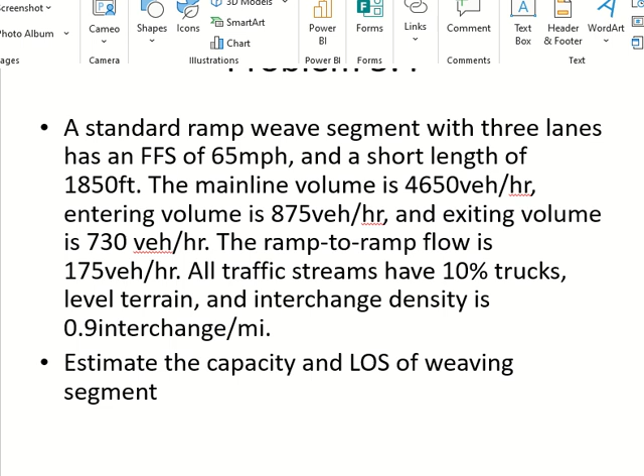Same? Okay, so what do we say here? What does it show? We check that it is less than what? So now we have the total flow and the capacity. So what can I say now? Oh, very good, I will give you that, yes.

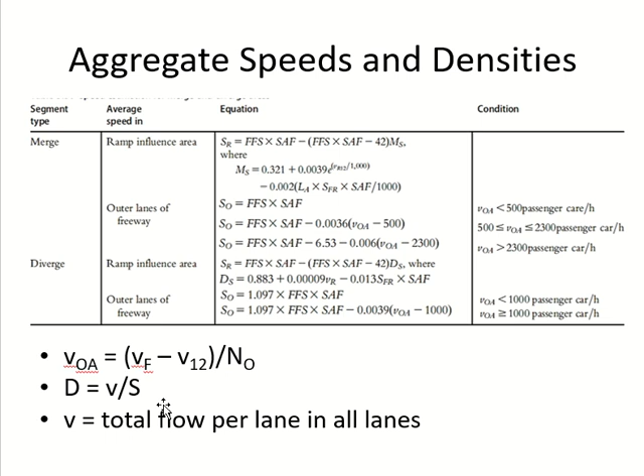And I need the ideal capacity for freeway per lane. How much is the free flow speed? 70. Is it given here? Yeah. 2400 - this is the ideal capacity for the freeway. If your free flow speed is not mentioned, in the previous slides you will see an equation as well. You can use the equation, but since our free flow speed is exactly 70, I can use 2400 here.

So what is the capacity of the weaving segment? 0.0765 times L, LS is 2000.

2127. For the check, I need the total - this is per lane, I need the total. How many lanes do I have? 3. So CIW is how much?

6381. Now our total flow was 5,700, right? So this is more than that. That means what? Good.

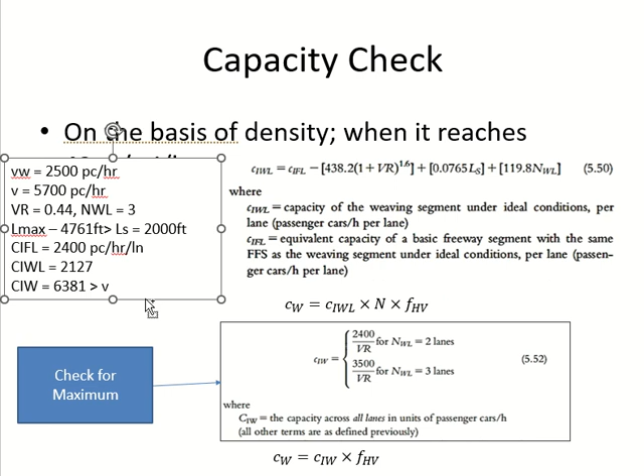The next thing we have to do is find out the lane changes, total lane changes. We have to find out the minimum as well - we did not do the minimum. This will give you minimum number of lane changes.

Both ramps are on the same side, so I will use the first equation. So how many lane changes required to go from ramp to freeway? If I go to my figure, one lane - ramp to freeway, 1. And freeway to ramp, 0. We are talking about required.

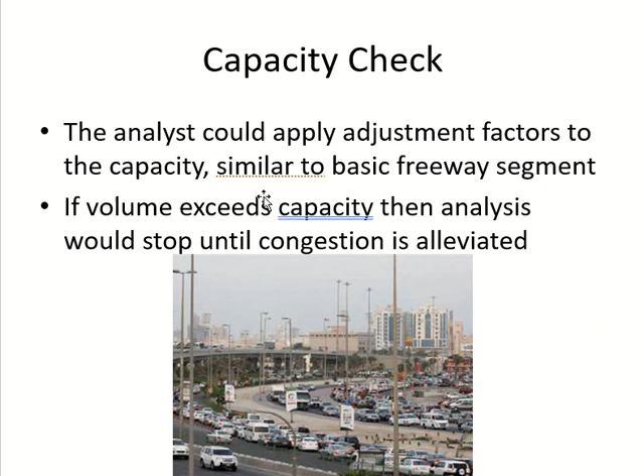Required - so you are on the ramp, you want to go to the freeway, you make 1 lane change and you are on the freeway. This is required. Somebody wants to go in the second lane, they can, but it's not required.

Somebody is on the freeway, he wants to go to the ramp, he can just continue - not required. Nothing required. He can select to be in the other lane, but that's his choice, not required. So ramp, freeway to ramp, 0. Freeway to ramp, 0. But there is one.

Where is 1? From the third - no, required. Required meaning what? You are in the right lane, and then you have to go - you are in the right lane, still you have to do, that is required.

Okay, if you are here, you should not be here. Why are you here? This is what you are thinking right now. Huh? Why are we here?

Okay, so freeway to ramp is 0. Ramp to freeway we have 1. What is the volume for ramp to freeway? 800. So 800 into 1 is 800. So minimum lane changes are 800, only for ramp to freeway with 1 lane change.

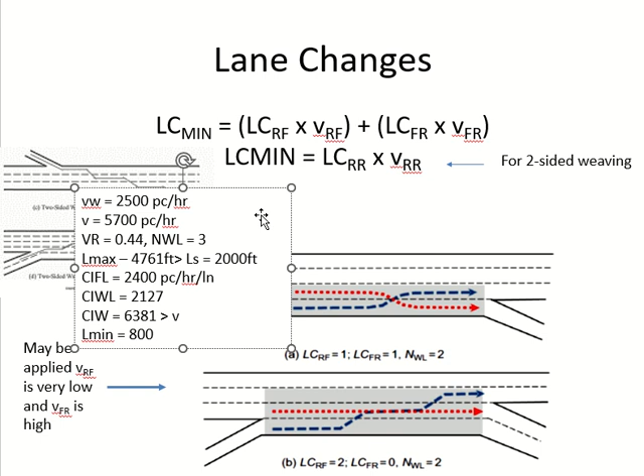Next, now we have to find out the total weaving lane changes. Weaving meaning people who are going from ramp to freeway or freeway to ramp. The one we calculated just now is required. So you are in the right lane, but still you have to make this change. So this 800 is required this way. We calculated the first one, now we still have to calculate this one.

Interchange density is given as 0.8. And total number of lanes, which are 3. LS is 2000.

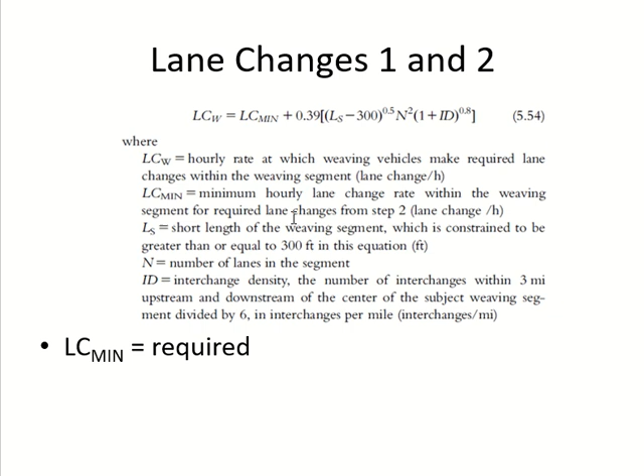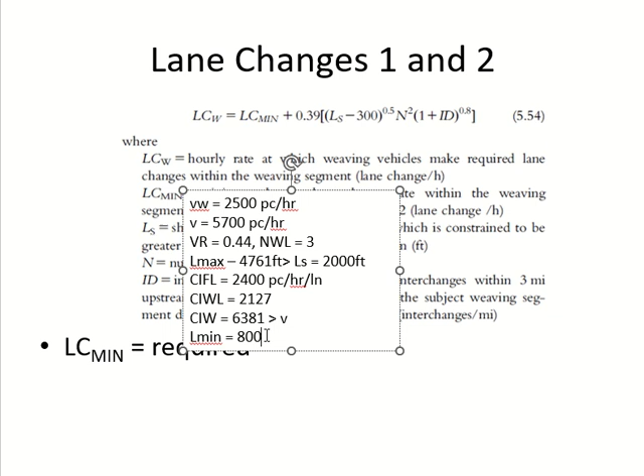How is that? Interchange density given 0.8.

Okay, we call them lane changes per hour. These are called lane changes per hour. So these are for people who are weaving.

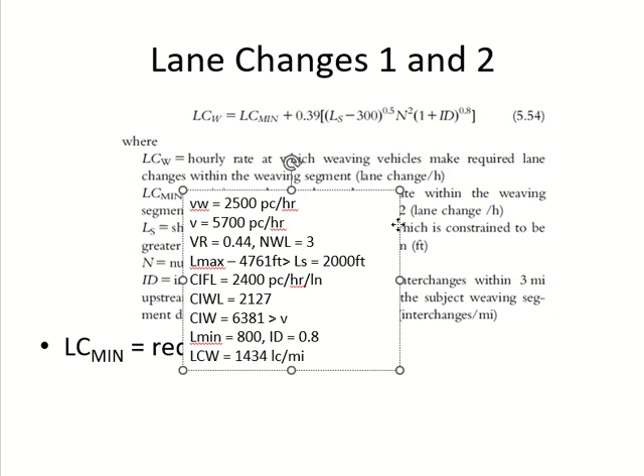And then for the other people who are non-weaving, we have to first calculate the non-weaving intensity. So again LS is given, this is given 0.8, this is non-weaving volume. My total volume is 5700.

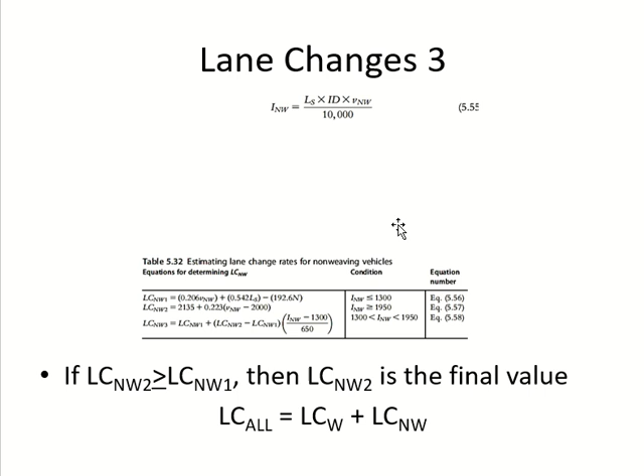And you can see the weaving here as well. 5700 total, and weaving is 2500. So the remaining is non-weaving. How much is non-weaving here? 3,200.

Give me non-weaving intensity. LS 2000, 0.8. 512.

Now we come to this table. This table says that if you are in this range, less than 1300, then non-weaving will be this one. And there is a condition given here that if you are doing this one, then check with this one as well. You have to calculate both of them, and you will take the one which is maximum.

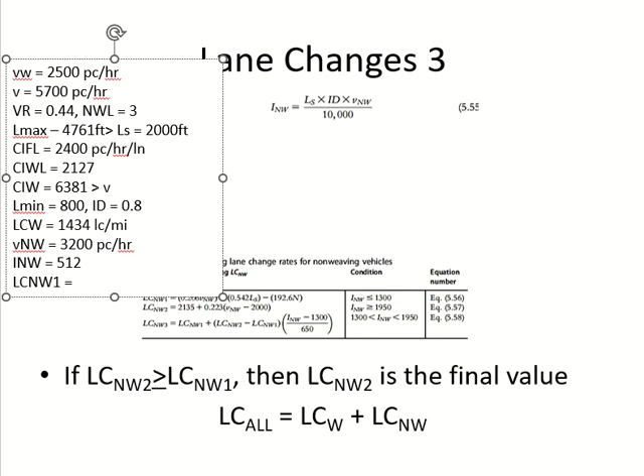We have to check more first. First, yeah.

But if our INW, it's not greater than 1950. Yeah, it's not. But they are saying that when you take this one, it should not be more than this one. No, it should be more than this one, yes. To take this, there are two conditions: INW should be less than this value, and this value should be more than the other one.

611, 612. No cheating, no cheating. No, I want to see how they did different things. No, 611. 2024 or 2402.6? Which one? Second. Okay.

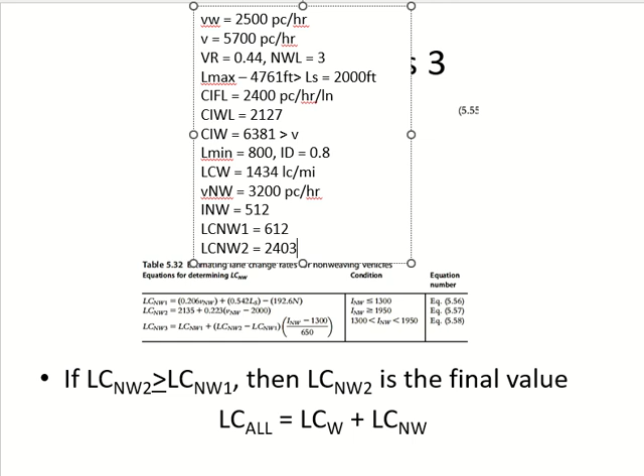First one is wrong. Which first one? NW1, how much is that? 1165. Everybody agrees? Yes. Okay, and the second one is correct.

So our answer still doesn't change. The second one is still higher. We'll take this value.

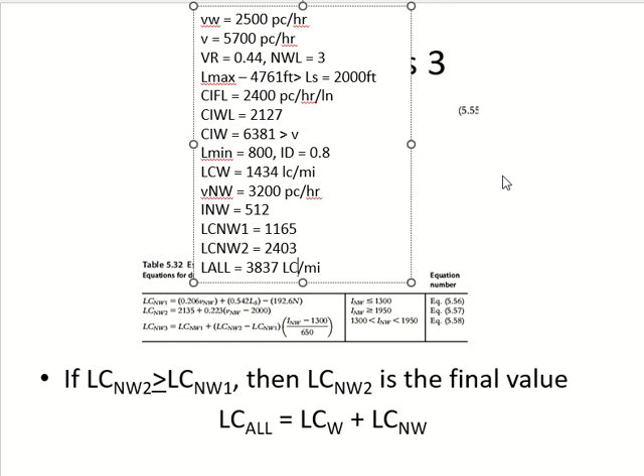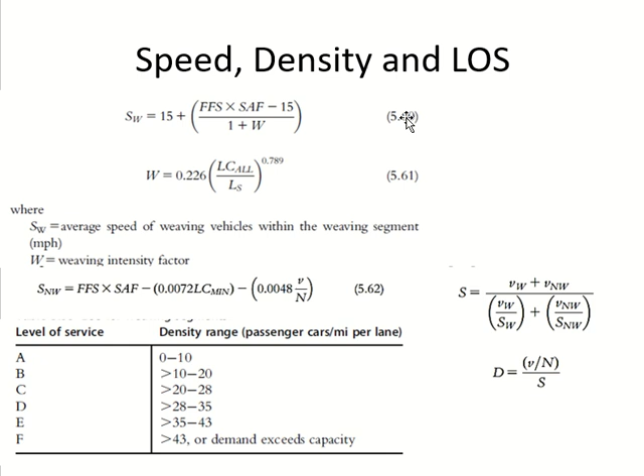Now we are at the last stage where we will calculate the speed of weaving, non-weaving, and we will calculate the total speed, the average speed, and then the density. Give me the weaving speed.

Okay, then the non-weaving speed, this one. We use total flow here and total lanes. Total flow 5,700, total number of lanes 3. This one.

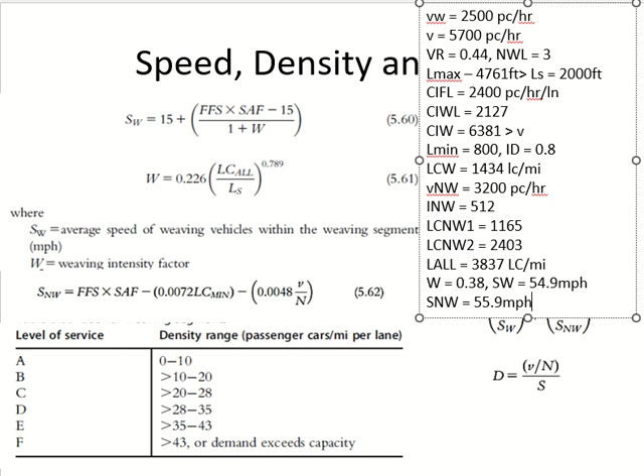Okay, normally non-weaving should be higher speed and weaving should be less. Weaving people have to make changes and they are going from ramp to freeway and freeway to ramp, so they will be doing it slowly and so on. Okay, then what is the average speed now?

So we'll add the weaving and non-weaving together now. Total volume 5,700.

63, huh? 63? Sure. 55.

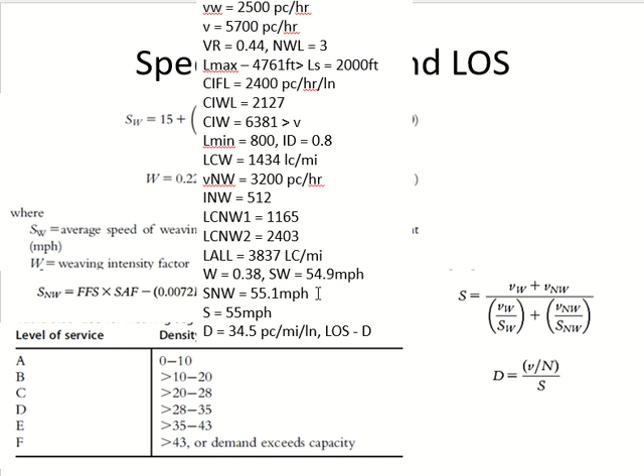Simple, innocent, right? More accurate. Very good. So simple average can be used if all segments have the same length, same number of lanes, everything is similar. Then you can add them all together, divide by number of segments. That's a simple average.

But we know if one segment is longer, it will have more effect on the whole freeway, right? So that's why we are doing weighted average. One segment has 4 lanes, another one has 3 lanes, so the one which has 4 lanes will have more effect. One segment is 2 miles long, another one is only 500 feet, so the one which is 2 miles long has more effect, right? So that's why we are doing the weighted average.

Once you know the density, then you can go back to the level of service table to find out the level of service of the entire facility. Clear?

Okay, these are some values. We have 4 different segments. For these 4 segments, we found the speed and density. The length is given, the number of lanes are given. Just a word here.

There is a merge and diverge segment here. Which one, or which ones? Maybe more than one. Can you tell me which of these four segments is merge and diverge?

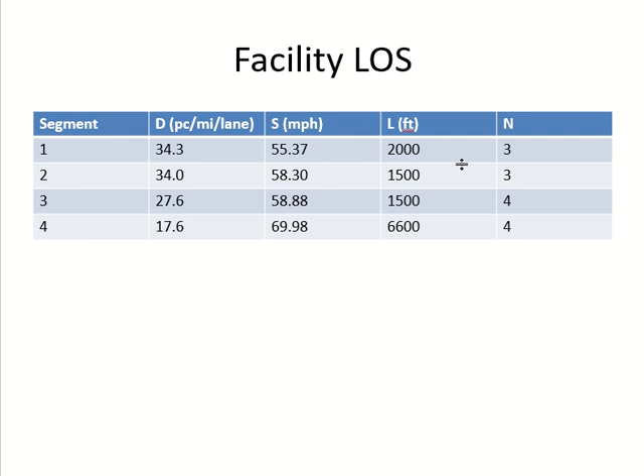Anyways, so what we need to do is for all these segments, first of all, we will calculate their flow. Flow equals speed into density.

Give me the flow for each one of them. 1982. 1625. 1625. 1, 2, 3, 1.

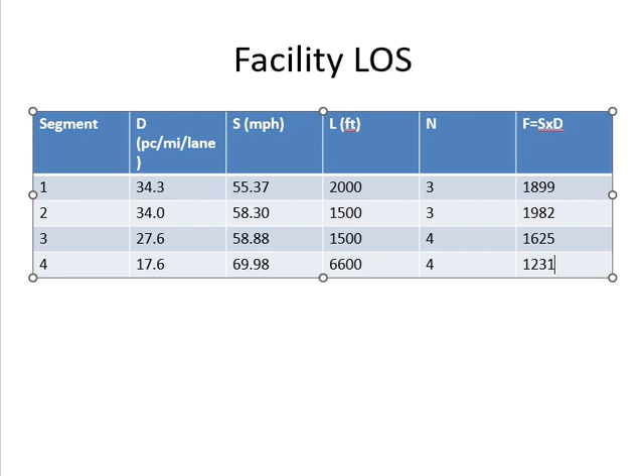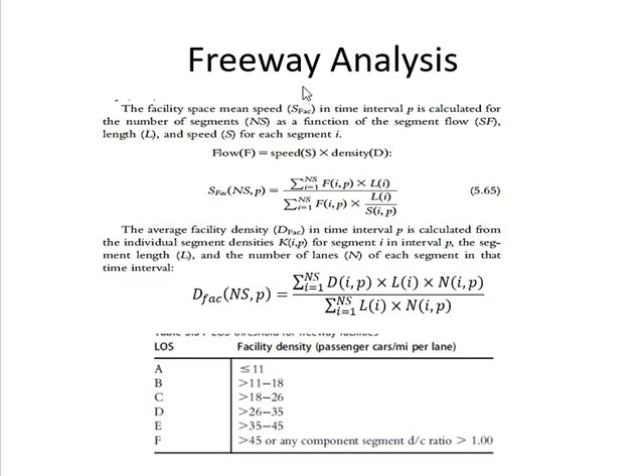Now we can calculate the speed and density of the facility. Give me the speed. You already have the flow, the length, and the speed. So summation of the 4 values here, summation of the 4 values here — so is the summation only for flow, or for flow into length?

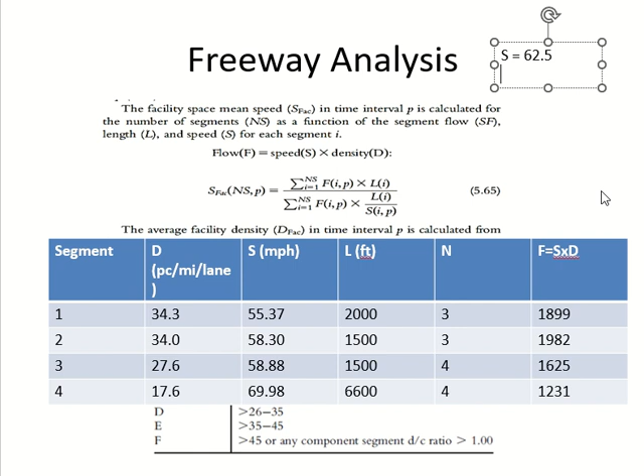Very good. How will you do it in the exam? Together? Together, no? I'll put you in 100. See, the one who is doing it alone is giving the answers. Even together, you cannot do it.